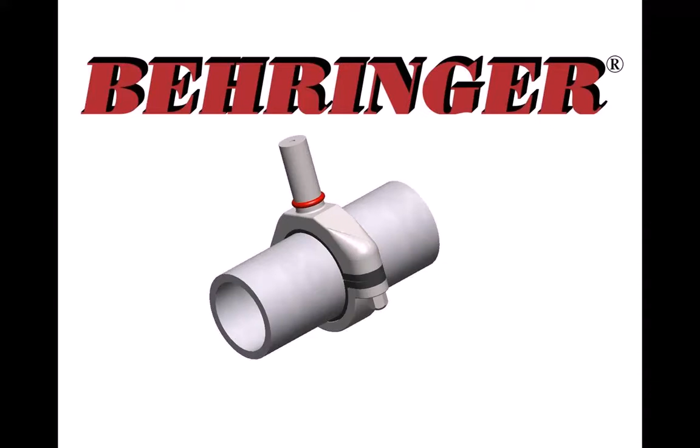Essentially, my plan today is to go through the PowerPoint presentation I've put together for the CH series. The intention of this webinar is really a pre-launch orientation for the compact hygienic. Since there's going to be a transitional period with the RH, which is and will be available for a period of time, I wanted to familiarize you with the changes incorporated into the CH design, because there are some new features, and a lot of the other great features that the RH had we're still working on and building from there. So without further ado, I'm going to continue on.

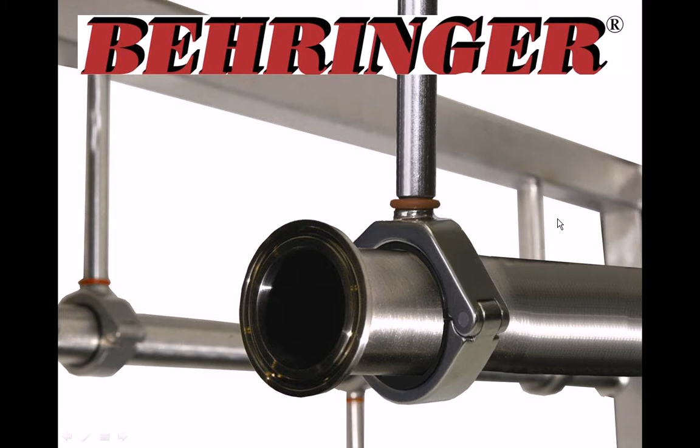Why is this not forwarding? Hopefully we'll keep the technical difficulties to a minimum. Do I need to just click every time?

Okay. And again, the topic that we're going to cover today is the next generation of the rounded hygienic, which is the CH or compact hygienic. So if you're familiar with the RH, and hopefully you are, this is going to be building upon what you already know, with some further enhancements.

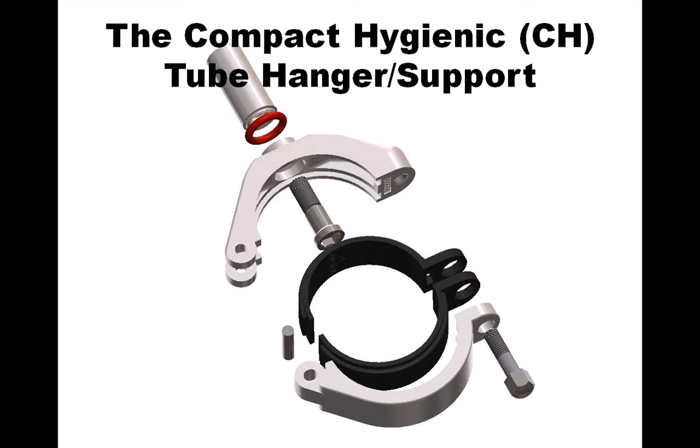This is what the exploded view looks like of the compact hygienic. In general, the design is very similar to what the RH had, with some enhancements which we will go over. But this just looks at all the components if you had them all laid out. These are kind of like the major bullets.

Overall, it's more compact, still hygienic as the RH version was, still has the rounded geometry as the RH version had, and has the strength to surpass any of the expectations as far as load capacity. It facilitates the installation, which we'll go over graphically so you can see the differences, and it is also BPE compliant. One of the other nice features is we've put an extra O-ring into the design to capture the acorn bolt, which again is more of an ease of installation item.

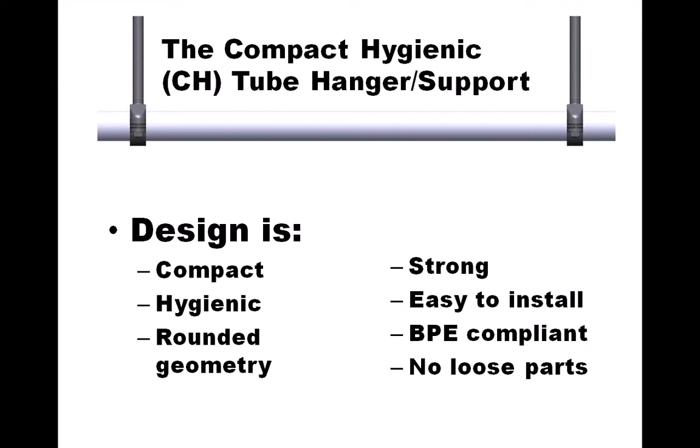Overall, it's very similar as far as the configurations from what we already have on the RH. This shows the graphic of using it in a sequence: you have the ability to create the slope without any additional stress into the line, as is common practice for other products out there.

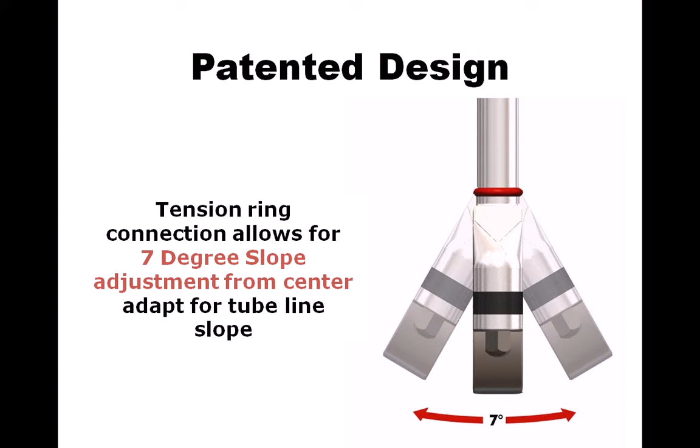The patented design remains the same as far as the tension ring and the slope adjustments with the shoulder bolt orientation. This again allows for the slope in either direction, 3.5 degrees, to comply with the current BPE recommendations for slope, regardless of whether it's on a skid or long runs. This shows graphically where they come in handy as far as putting in that 2-degree slope.

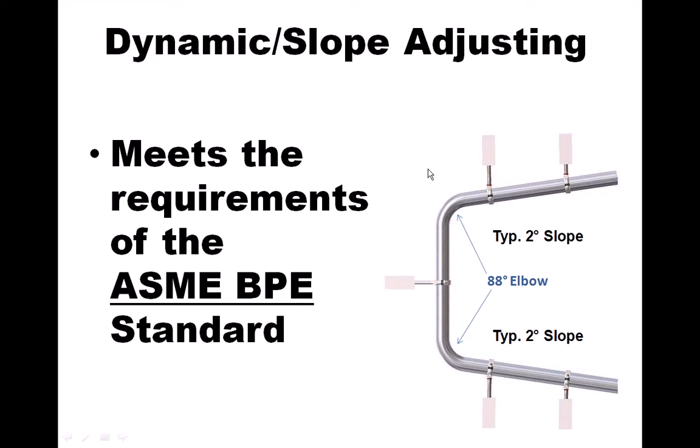BPE does have a table, as I referred to, covering 4 different options as far as slope requirements. So again, this has the same features as the RH, so nothing's lost in terms of meeting the requirements. It's compliant with the standard, it incorporates some innovations to make it easier to install, and has the same features as far as handling stress areas, concentrated loads, or other challenges in process piping installation.

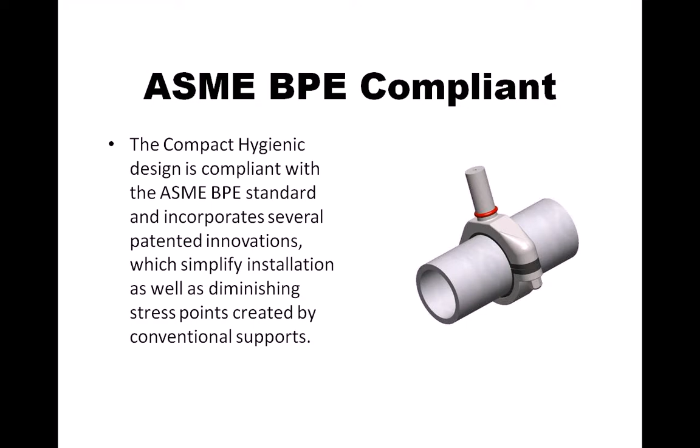So overall, the CH series has the same rounded geometry. There are a few key areas where it will make a difference, and more often than not, you hear, what is it going to mean to me? The bottom line dollar may be the bigger impact as far as benefit to every end customer.

As for weight, what we ended up doing was trimming out a lot of the material while maintaining the strength. The weight in groups 1 through 5, which represent 2-inch tube size and smaller, has anywhere between 30 and 40% material weight reduction, which is fairly significant, and in terms of dollars and cents, that's where the cost savings will come into play for the end customer. It is slimmer, and I'll have a graphic on that in a slide or two. It meets all the strength and durability requirements. We're actually just finalizing some of the testing.

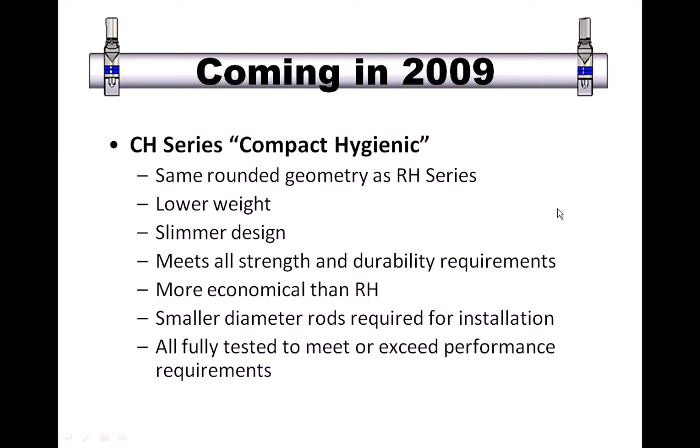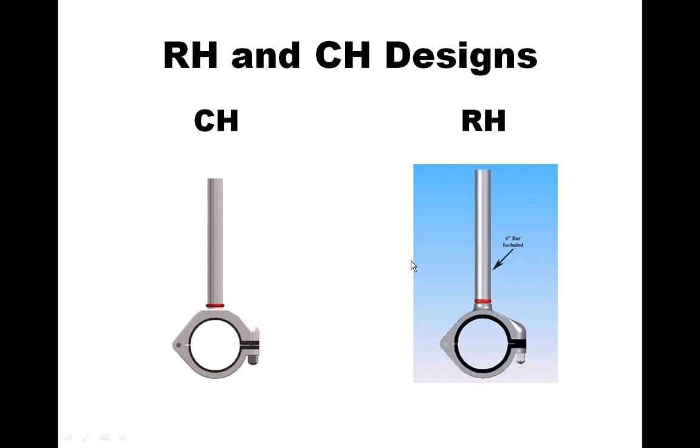I have the next screen up here. It won't be easy to differentiate because at this view it's not as distinguishable between the RH and the CH design. But in a nutshell, what I'm covering here is the 1 through 5 sizes. The width drops by 1/4 inch, and the rod sizes, rod diameters rather, for the dynamic and the threaded housings will also drop down in size. So again, facilitating maybe less time for welding of the rod, certainly a lower cost because less material.

There is a slight centerline difference comparing the RH to the CH due to a smaller dimensional envelope. One of the key elements in the design development was to maintain the ability to fit this within 1 inch of insulation if it's designed to be insulated. But as a result of using smaller geometry on the housing itself, it changes the centerline difference. So if people have our drawing embedded into any of their process piping designs, we will certainly have all that same information, CAD drawings and 3D models, available to pass on to the customer and let them embed into their new piping designs and be accurate.

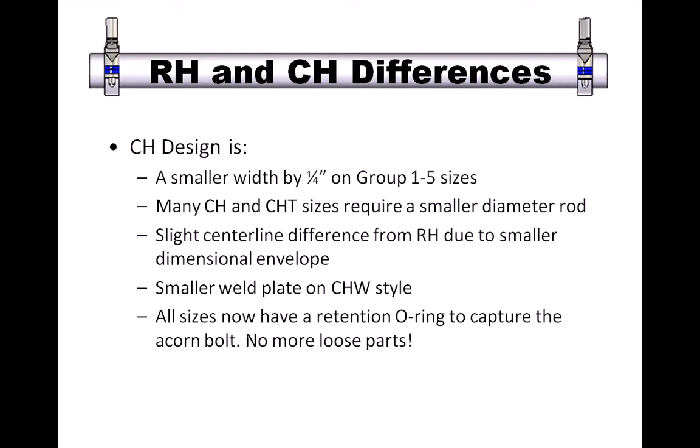The other change that we did was on the Weld Plate version. We reduced the size of the Weld Plate. I'll have a graphic that'll show that in a little while. And again, another key feature is we're capturing the acorn bolt to eliminate the worry during installation of losing a bolt if they're high up on a ladder installing any of these, to eliminate any loose parts. So a one-piece design, so to speak.

Lends itself to the question, well, what's going to happen with the RH series? The RH series is going to be slowly phased out but supported in the interim. So we're going to maintain the stock for the RH for a period of time, possibly up to 2 years, certainly to support any kind of replacement inserts, as that may be a need. We're going to have the CH available. Well, I have listed first quarter, but it looks as if it's going to be... Currently, we do have a bit of that group 1 through 5 on hand, but just not all sizes and all configurations and all inserts. And so we are just in the process of building over the next handful of weeks.

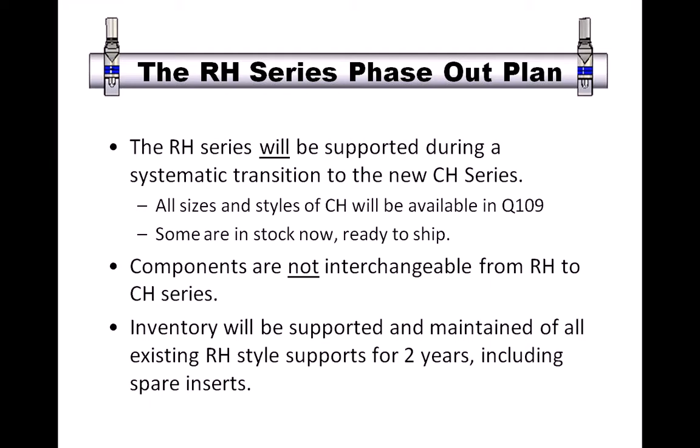The other point I wanted to make was the interchangeability. Again, groups 6 through 9 on the CH are going to be very similar to the existing RH. There are some modifications that are going to be occurring, but the width will not necessarily change from the RH version. We're going to have dedicated inserts for the CH for all sizes. So again, we're looking to have this for a couple of years. So if people have it spec'd in and don't feel the need or desire to change, we'll certainly support it for a period of time, as far as at least having inventory and the capability of producing it for future use.

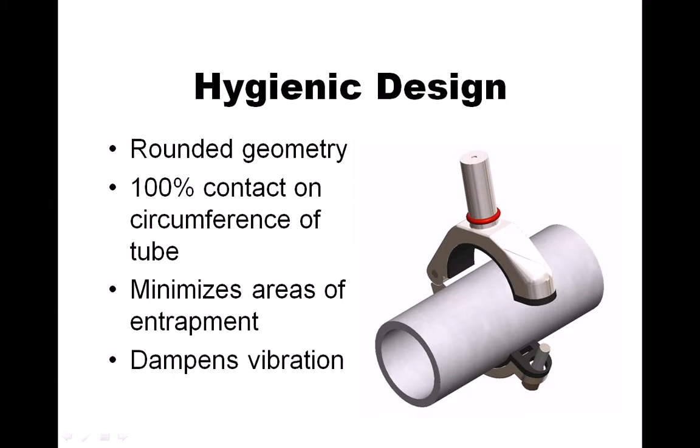That design in general is the same as the RH, rounded geometry. Still maintains 100% contact on the circumference of the tube. Also applies for copper tube and pipe if that's what the process demands. It minimizes area of entrapment and, in addition, dampens vibration. We want to maintain those as key design features for this product and not lose anything from the rounded RH series.

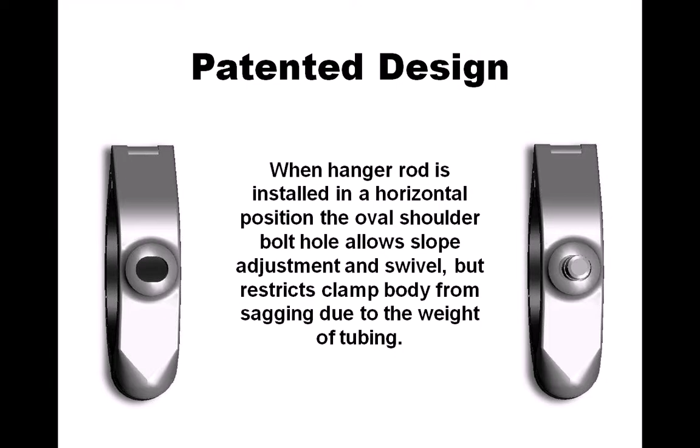The design, again in principle, is the same as far as the housing itself, where the shoulder bolt comes through and allows that slope adjustment in one direction and restricts the clamp body from sagging in the perpendicular position. So same features as RH.

The other thing we are also maintaining is the ability to offer the fabrication stanchions for floor stands as well as hang mount, which will help facilitate the installation process. It allows for flexibility in installation so that it can be done with a simple tack weld and a follow-up weld to seal in place at the proper height once they assign what that height needs to be for the slope requirement.

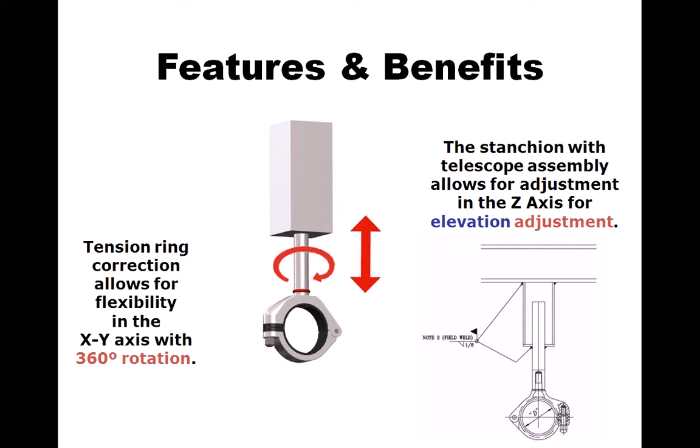The other key element I pointed out here: no loose parts. So it arrives and it can be installed right from there, no need to put it together or kit it before it's actually installed.

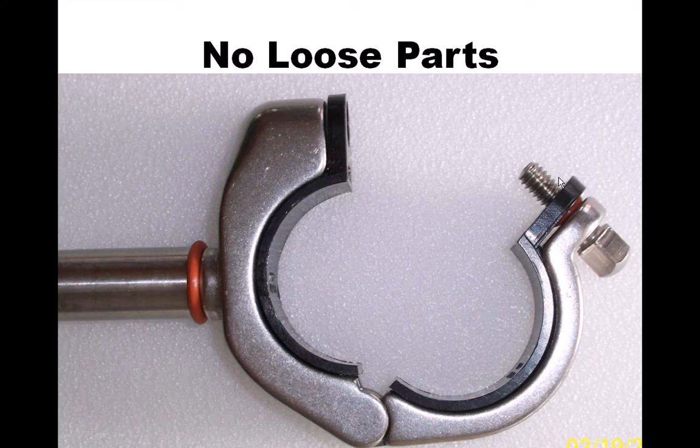Here's a picture that shows where the acorn bolt has an O-ring on it to retain it. It was actually a very simple addition. We looked at capturing the acorn bolt in several methods, but this one seemed to be the best solution. Essentially what was done is the insert itself has a hole for the acorn bolt. The hole was opened up a slight bit, enough to allow that O-ring to fit and nest inside of it. So again, it doesn't take away from the installation or functionality of the part.

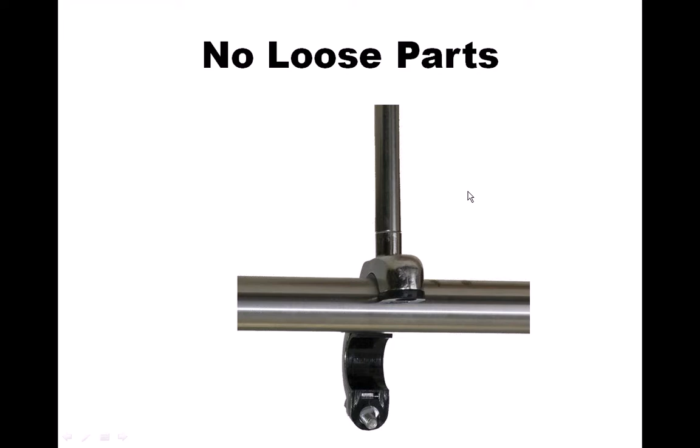Again, the whole point is to make it easier and user-friendly, so no loose parts. The size range is the same size range as the current RH.

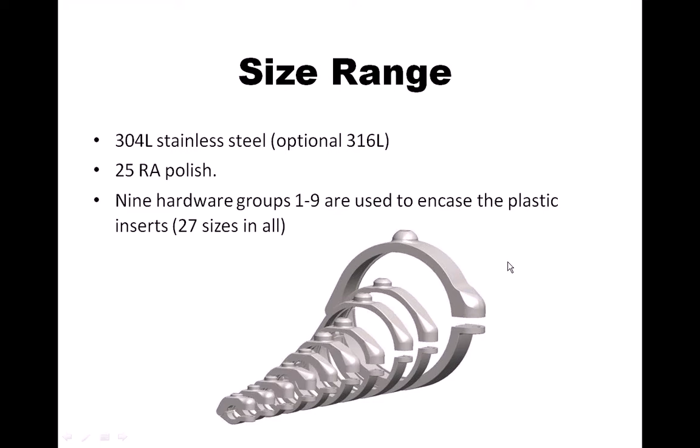We have housings and rods in 304L stainless steel as the standard, also available in 316L, with a 25 RA finish on all steel components. The hardware groups 1 through 9 - actually 10, because we have an 8 and an 8A - encase 27 actual sizes in all, which simplifies some of the inventory requirements.

It's just showing us some of the models, how they stack up - you can see graphically how that looks.

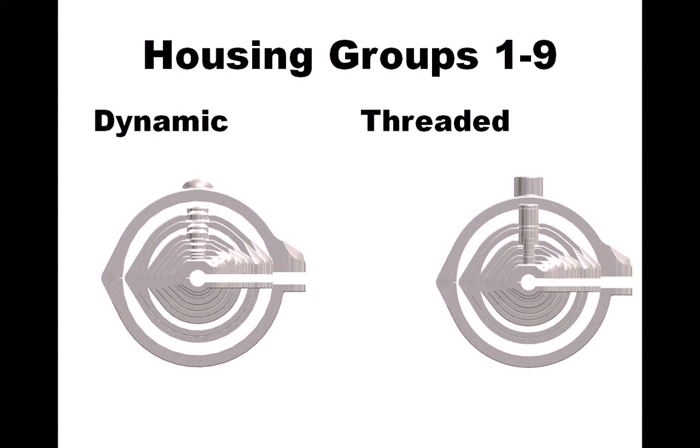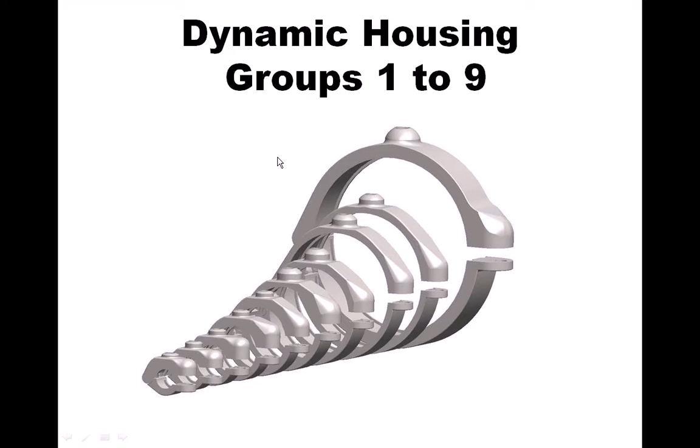This is the dynamic housing. As you can see, the collar is rounded to allow that slope adjustment feature. And for the threaded housings, you may notice that the collar has dropped in diameter, so it's more of a slimline look to it. But again, same thread engagement.

This covers the housing groups and shows the different size range within. As I pointed out, groups 1 through 5 would be the first thing made available. So I believe that's where the cost differential or benefit would show up as well.

In addition to having all the inserts for tube size pre-molded, we're also having all of the copper and pipe sizes pre-molded so there's no additional lead time in terms of boring out a blank component. Up to now, and currently with the RH, copper tube inserts were milled out of a blank, and there would be a lead time associated with it. But with the increased demand for copper sizes, we're having those dedicated and already pre-molded.

We're also considering having a color code system, so there would be 6 colors. That might be further down the road later this year, but we're still going to have black as the anchor and gray as the guide - same color scheme as we currently have. We've had some requests for differentiating the copper guide and anchor and the pipe guide and anchor in a unique color scheme, to make it easier to identify while in service and for installation purposes.

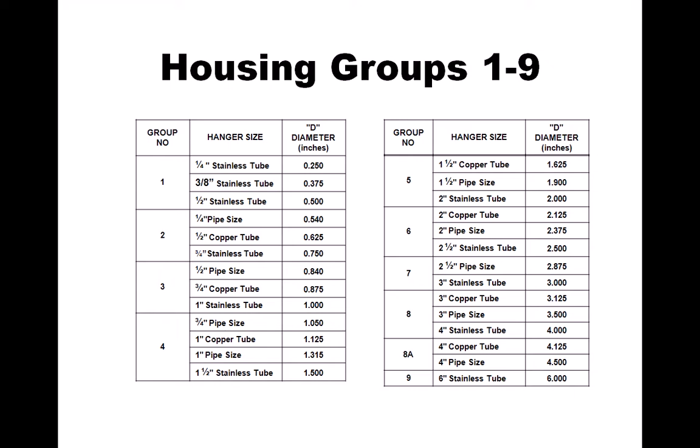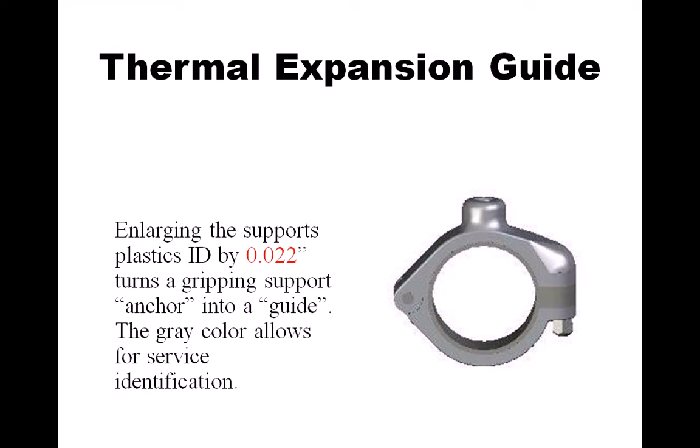Let's see, again, the thermal expansion guide is going to have the gray color. The diameter of that is 22 thousandths larger than the anchor, to allow that to have free thermal expansion for any SIP process that customers may have in their application.

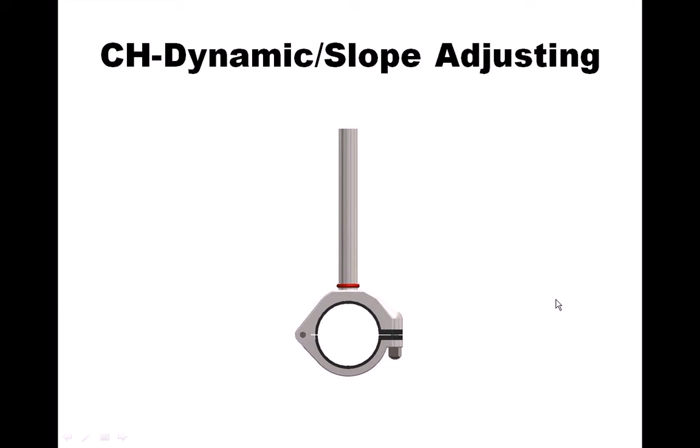The first one I'm going to cover is the dynamic. This is just showing you in general what you'll notice in the catalog, which is soon to be released. The way we differentiate is we changed the figure series to a 200 series from the 100 series on the RH. Again, the design feature to self-adjust and allow different positions and degrees of slope remains the same.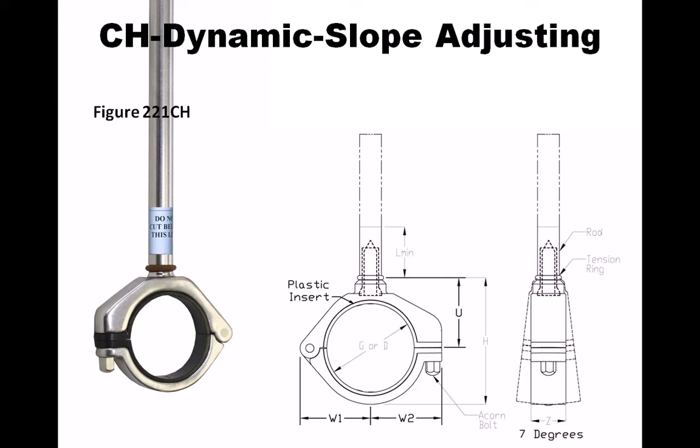But from our rough pull from the field, and shown by some people, it's just a matter of adjusting when they're installing to scribe at a different level, assembled as they go from the initial point of installation down the line. And again, with the inserts, to highlight there, black is still going to remain the anchor, gray will remain as the guide.

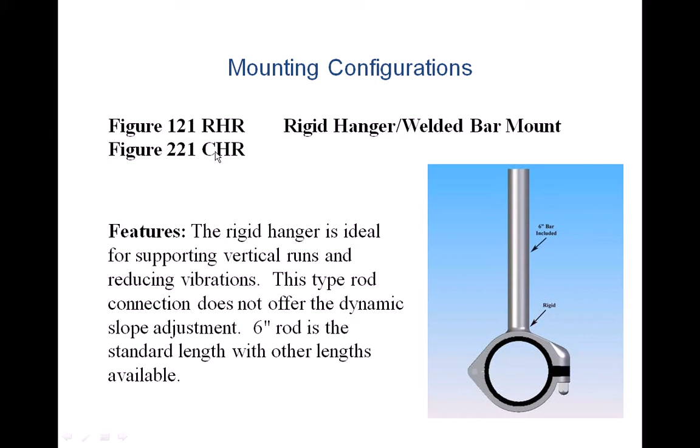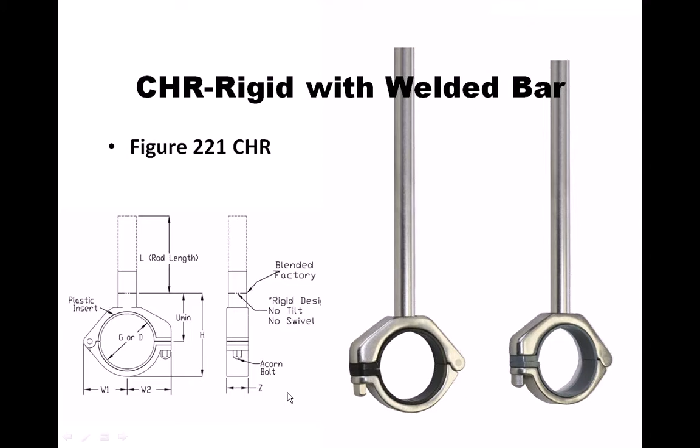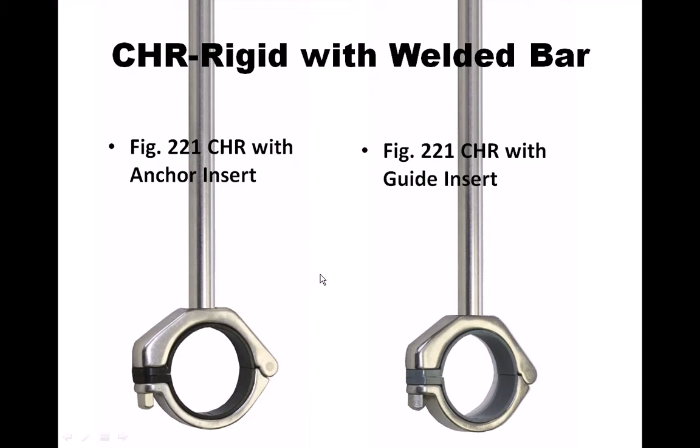The rigid with the welded bar, pretty much the same story as pointed out earlier, 200 series, so it's a figure 221 CHR versus the 121 RHR. And again, the rigid design is identical to what it was prior for the RH. Just showing what it looks like, as you can see, it does have a slight different look to it, certainly with the slimline, more compact dimension on the housing.

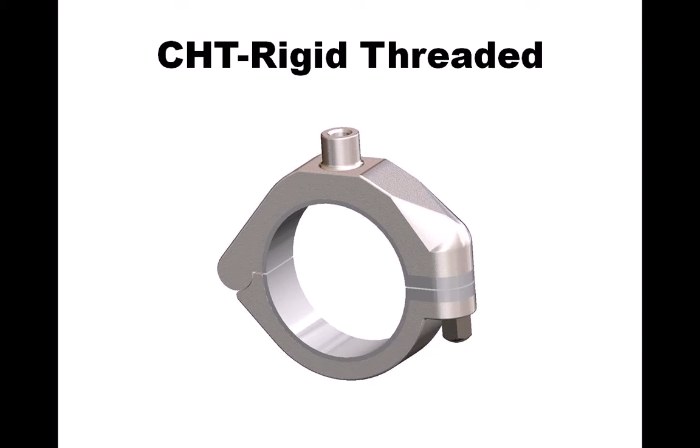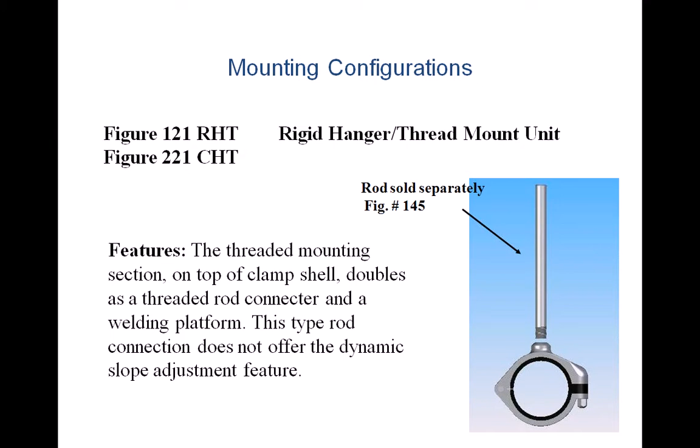Next one is the threaded version, and as I pointed out, the collar on top of the housing is going to be smaller than currently with the RH. But as far as the orientation for the thread, it's the same as it was. The rods again come in different lengths, same as it was for the RH. And again, it goes to a CHT as far as the part number prefix.

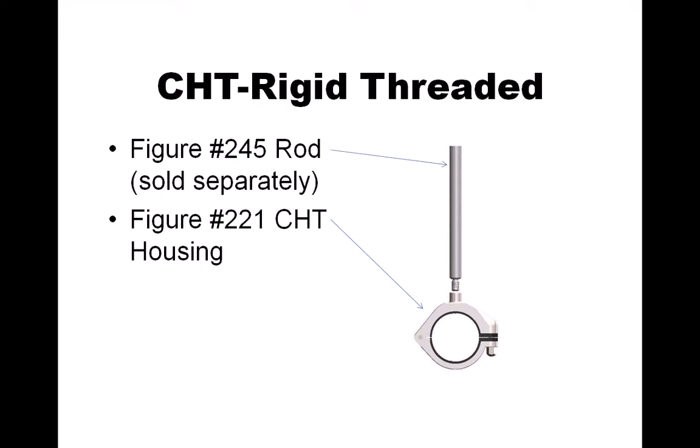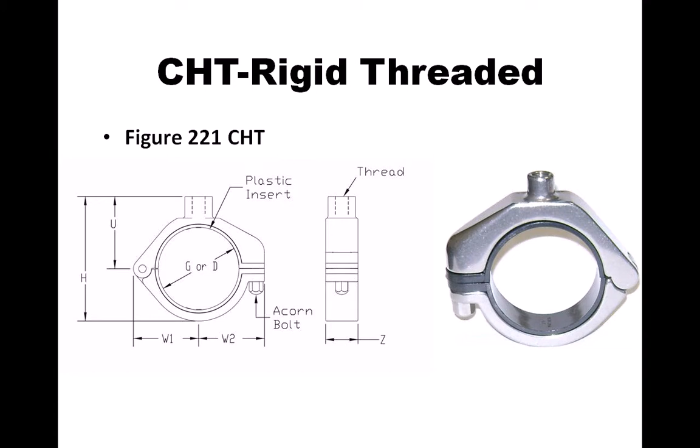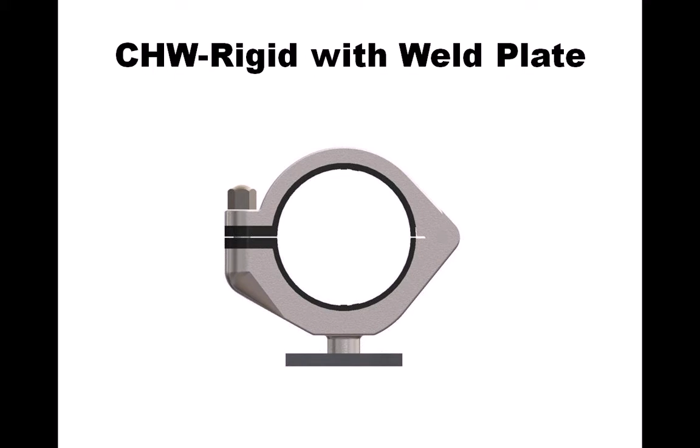The next version here is the weld plate. The weld plate itself, after receiving some feedback from customers, and more typically for OEM skid manufacturers, the size of the weld plate was unnecessarily large, larger than it needed to be. Certainly from a strength factor, we could reduce that size and maintain the integrity of the component.

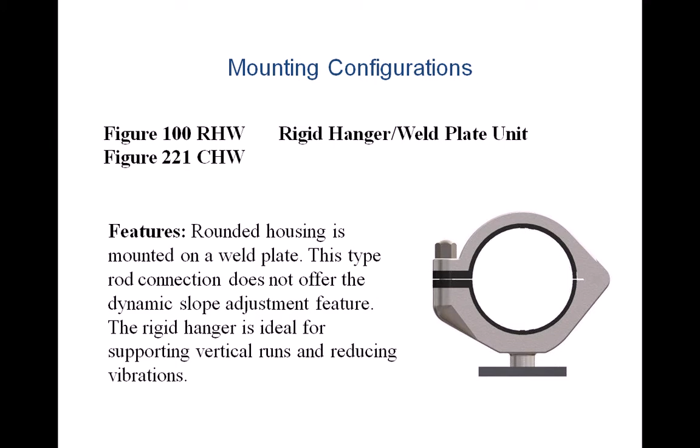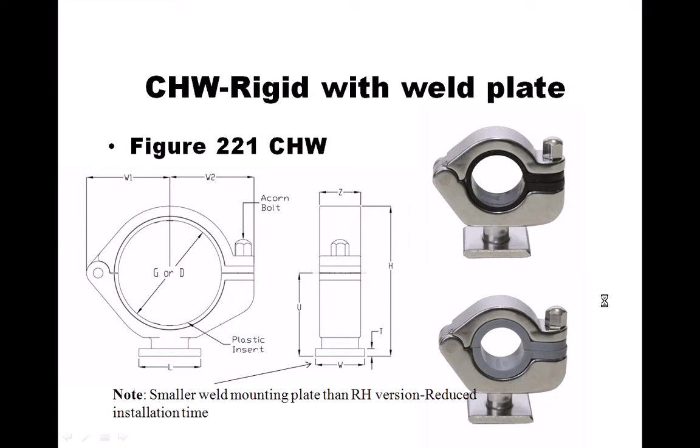And more importantly, it's to save on installation time. What we ended up doing, as you can see here, the pad is a 1.5-inch square pad, so that would also allow for less welding time and be able to fit, if it's a 1.5-inch square structural piece, as far as square tube being welded to, for a more clean line at the installed point. Again, same scenario as far as the anchor and guide.

These two are fairly new additions, at least as far as putting in the catalog. They may have been available, but we're throwing these out as standard components. The figure 223 is a base stand with a reduced size pipe, primarily to be used in the very small and smaller end of the group sizes. We also have a rod stand plate on the right, which is similar to the rigid, but instead of having just the rigid version, it would also be welded to the stand plate, all ready to be installed.

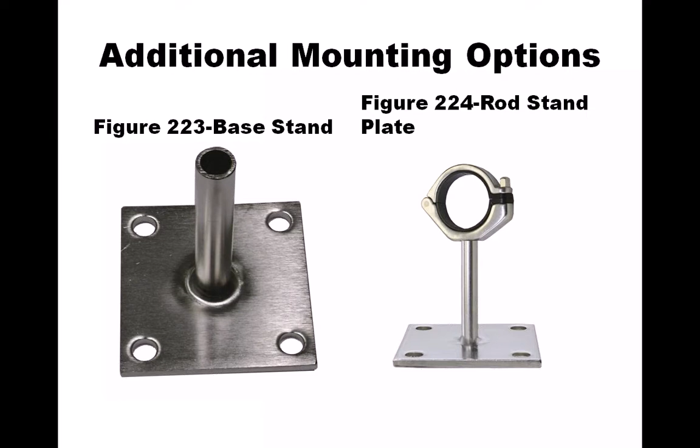The floor mount stanchions are pretty much going to be the same. We have a variety of stanchions, whether produced with square tube or round pipe in different diameters. We're just highlighting all those options for people.

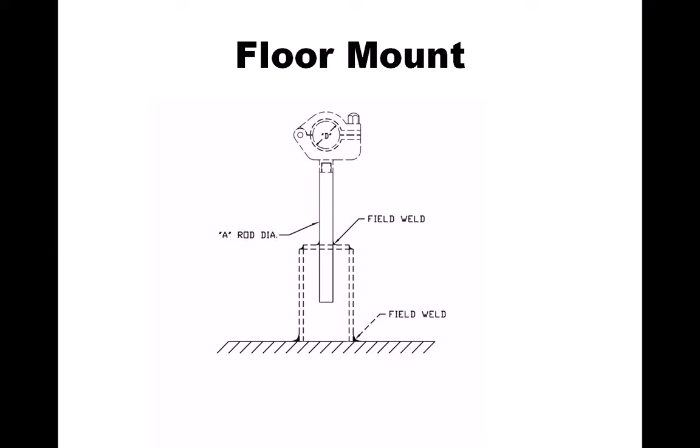Hang mount, as shown before, just showing the orientation. Typically for installation, you have two field welds. The stanchion can be welded to the structure on top, and then the 1/8 inch fillet weld is performed once you have the rod inserted at the proper height.

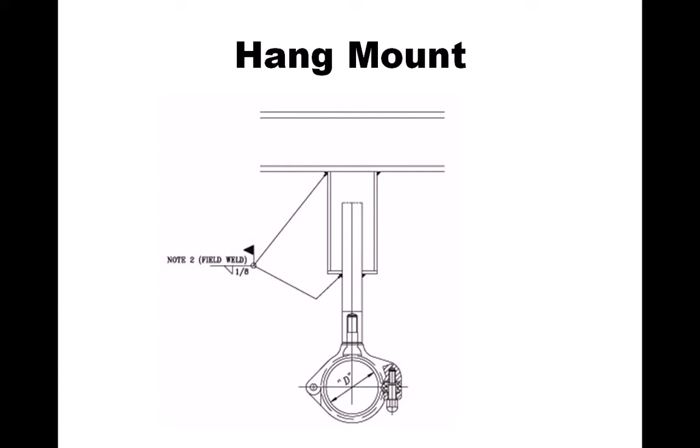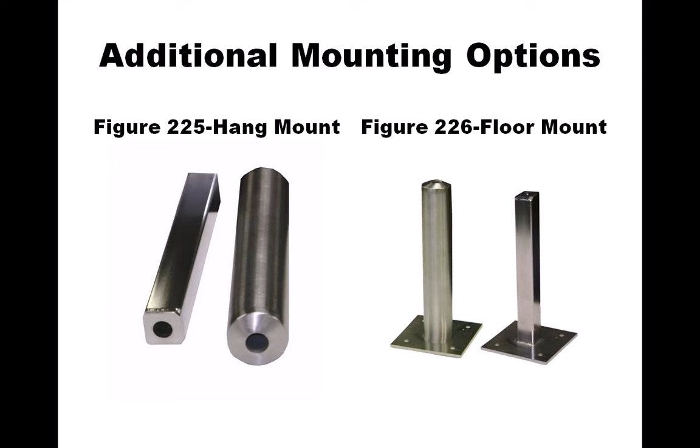The plate welded onto the square tube is flat, whereas the rounded version has a dome feature. We actually fabricate both versions in-house. The dome is not your typical A403 weld cap, a piped weld cap, but we press them here in our facility, and it has a dome for drainability.

As far as technical information, if anybody requests any 3D models, drawings, or PDFs for any individual drawing or models for any of the sizes, they are available. Whether or not they'll be posted on the website or just available on request will be determined, but they certainly are available. We also have MSDS sheets for the inserts if requested.

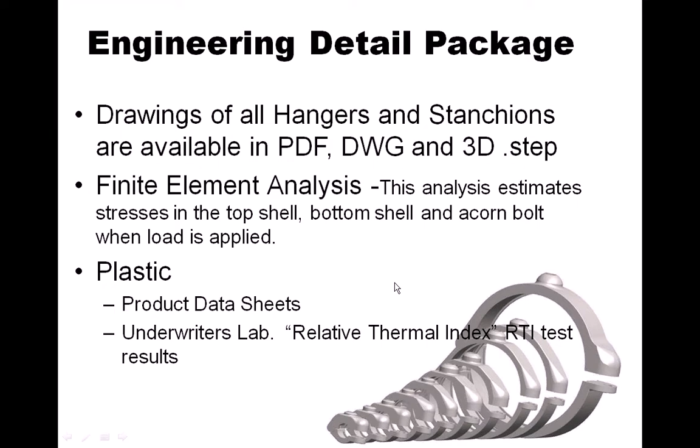Just highlighting the testing that was conducted. There's a load test and a shear test. The load test is to ensure that it's strong enough to handle the weight.

These components are designed to handle much more weight than you would typically ever see in practice for the process piping. But there's a safety factor involved just in case there's any additional impact of concentrated loads, not necessarily the process piping, but any of the adjacent equipment.

The shear test is also designed to make sure that it grips properly, that with the anchor insert it will hold against a lateral pressure.

We have that in our catalog as a shear force value, and I have an example there. It's 400 pounds of shear force on the 3-inch tube size. Again, that's with an anchor insert, not necessarily a guide insert.

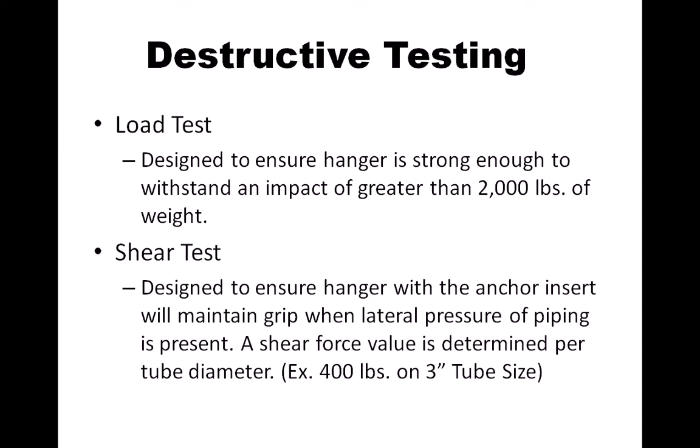This graphic simply shows the load test we've performed, which certainly surpasses any requirement most people would have to hold the weight, with water and insulation, per 10-foot section, which is near to where you would typically have spacing between supports.

Without having any sagging occur, you're looking at less than 100 pounds up through group 5, the 2-inch tube size. It says pipe size, but that would also apply for lighter scheduled pipe, not necessarily Schedule 40. Less than 100 pounds on those smaller sizes, and even up through 6-inch, 345 pounds, and we've tested far above 1,500 pounds. So there's certainly a safety factor covered on any of these.

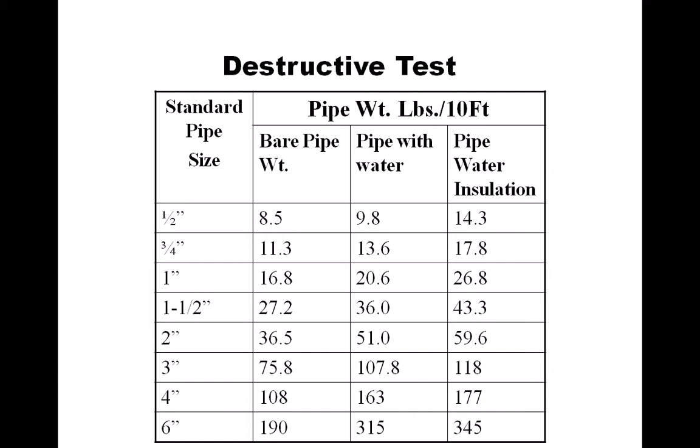Here's some graphics showing the test rig setup when we perform these for all the sizes. Here's a load test, as you can see we've got 1,500 pounds of load put onto the entire assembly, and we have a report on the findings after any load tests are performed, just to capture any distortion or deformation.

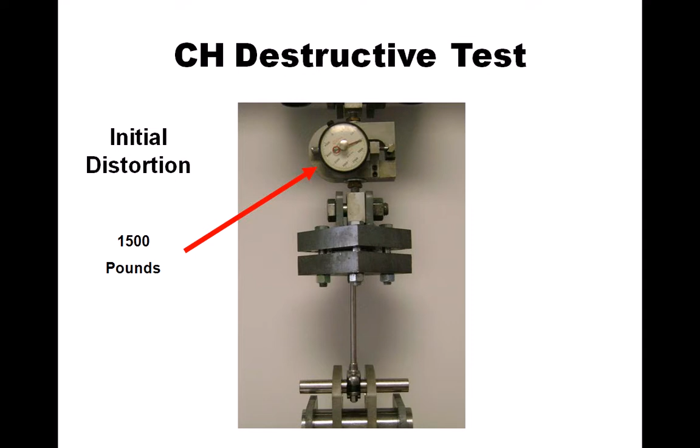This one is just highlighting that separation begins to appear between the plastic and the tube. That's the first thing that starts to fail when you're putting it at loads greater than 1,500 pounds.

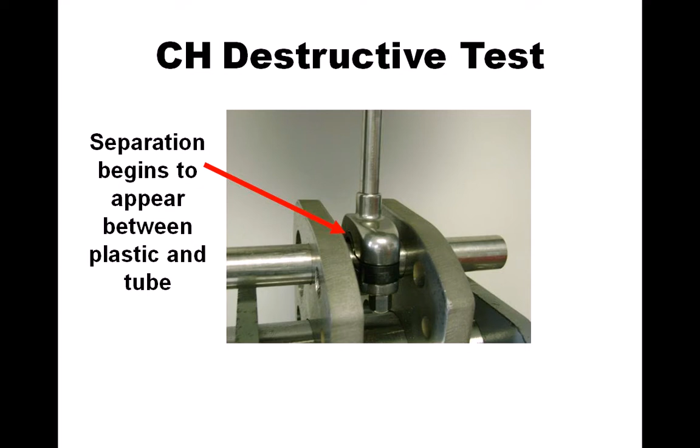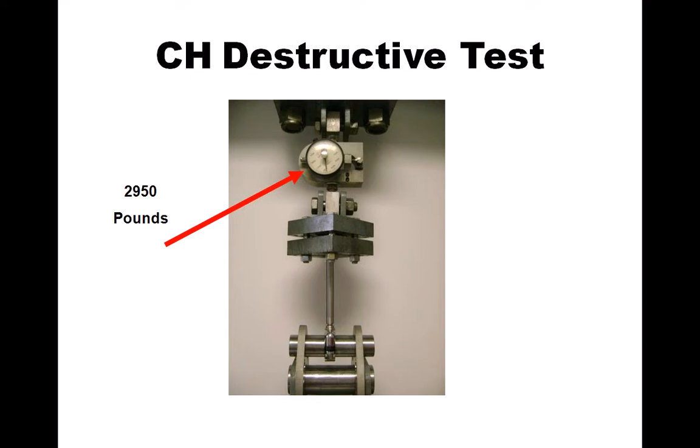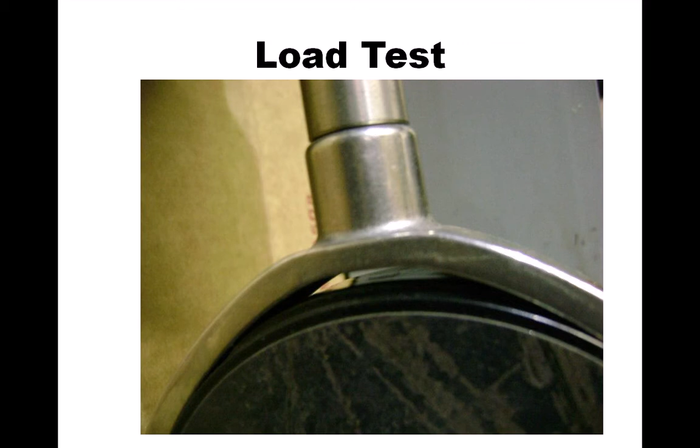It's just a picture showing how it deforms. The shear test, as you can see on the top of this picture, we have the threaded housing oriented on a vertical piece of pipe, and then the test rig pushes down upon, there's an anchor insert on there, pushes down upon that. As you can see, it's nearly 500 pounds of force, and what we do is we measure if it holds and if it slips, any distance that it might slip at the different weight, or I should say the load imparted into that.

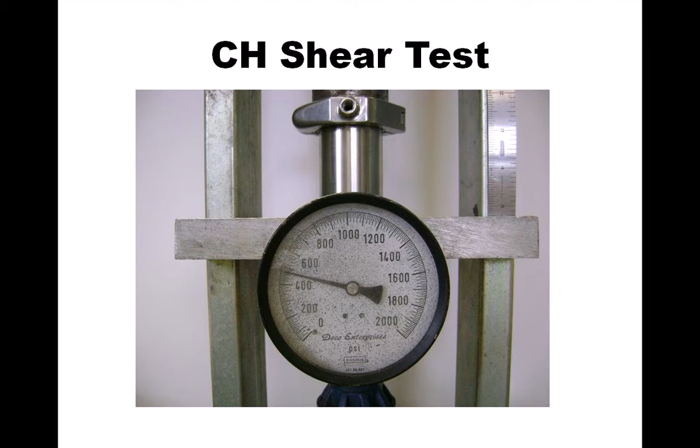This just captures what we found at the end of our load testing. Pretty much all has the same result, that a gap appears between a tube and the clamp at the top at 1,500 pounds. At 2,000 pounds, or in some cases the larger sizes 2,500 and 2,950 pounds, it stretches and the gap increases. The acorn bolt tends to bend, but again, this is at 2,000 and 2,500, which hopefully will never be an actual

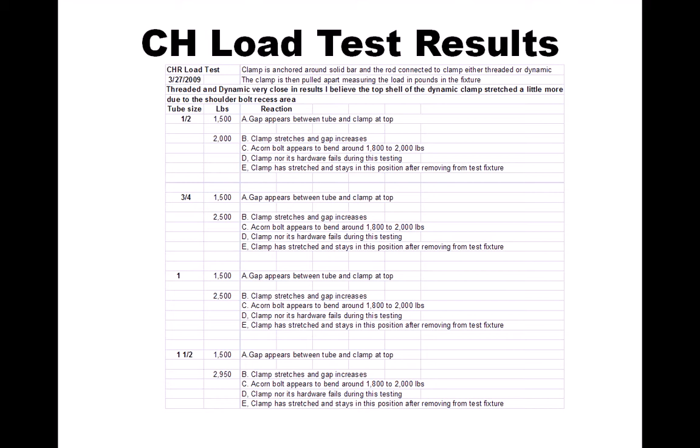service level. And neither the clamp nor its hardware fails during any of the tests, and that's important from a standpoint that even if it does deform at the high force, it never fails, opens up and drops any of the piping. And when it's stretched, it stays in position after removing, and again, that's typical for any cold working of stainless steel.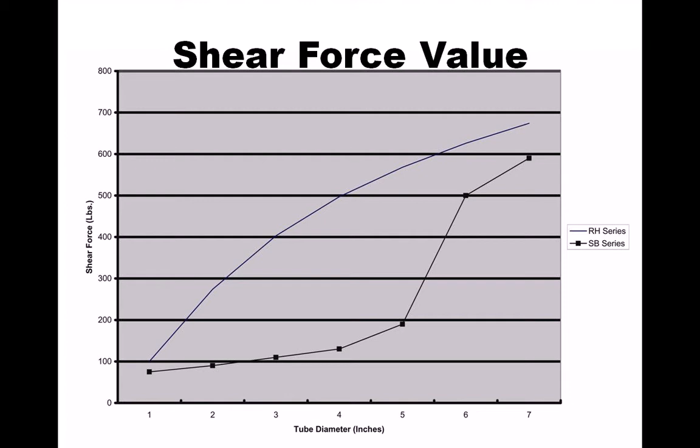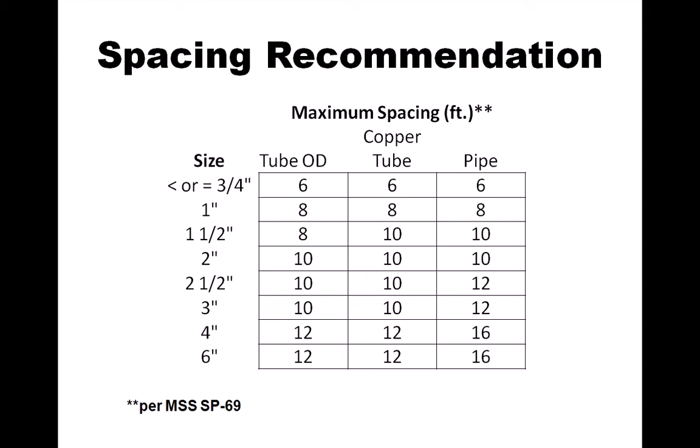That will take a little bit more of a time frame to integrate, but we're looking at later on into the fall once we get through our launch and regular production of new components, and that's based on increasing our PMI. It has certainly been a requirement for the fittings industry, and traceability. Even though this is not necessarily a wetted component, there have been requests to have traceability on it. It helps us for material control as we get raw material in and need to segregate that by lot.

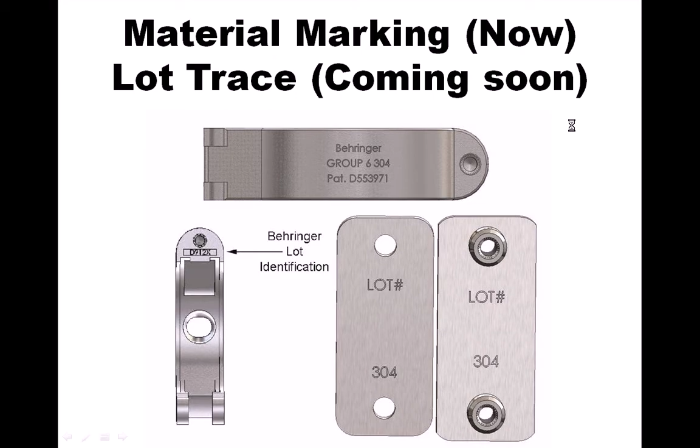Availability. Once we do have it launched, if you have a requirement for copper size inserts, they'll be pre-molded. There won't be any waiting time to have them milled, which is good news. So UPS orders, if we get them before 2 o'clock, generally ship within 2 days, same day if available upon request. Larger orders will have to ship common carrier within 5 business days, and the special orders, which really are going to be the fabrications, the stanchions, are 5 to 10 business days. So we're maintaining that quick turnaround on orders, small or large, and also facilitating a dedicated insert for the copper size.

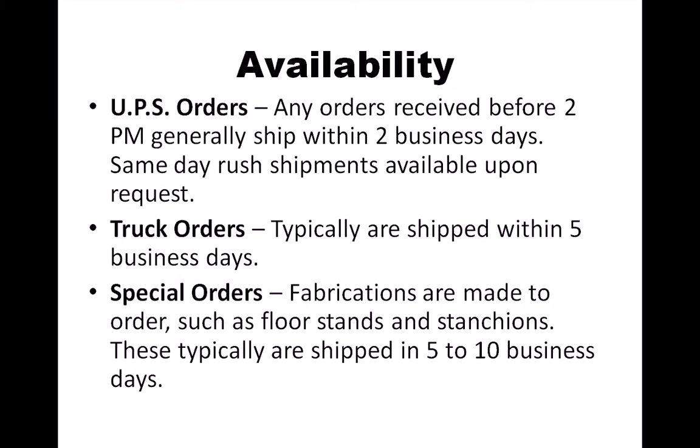That is the presentation. Hopefully you've learned something and are prepared for the Compact Hygienic series when it becomes available. There will be an announcement sent out. We're trying to incorporate monthly mailers as a push email so that everybody is brought up to speed on a more rapid basis. This is for all of the Behringer products, but there will be a few of them that I've put together as part of the launch.